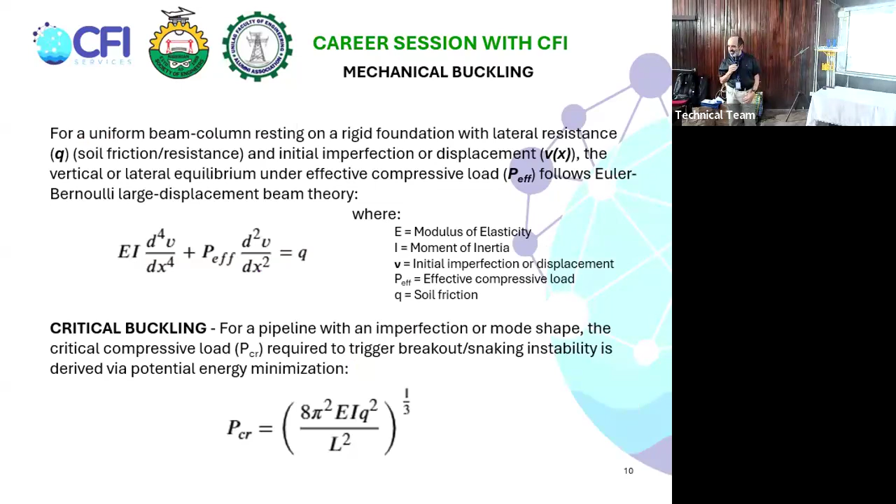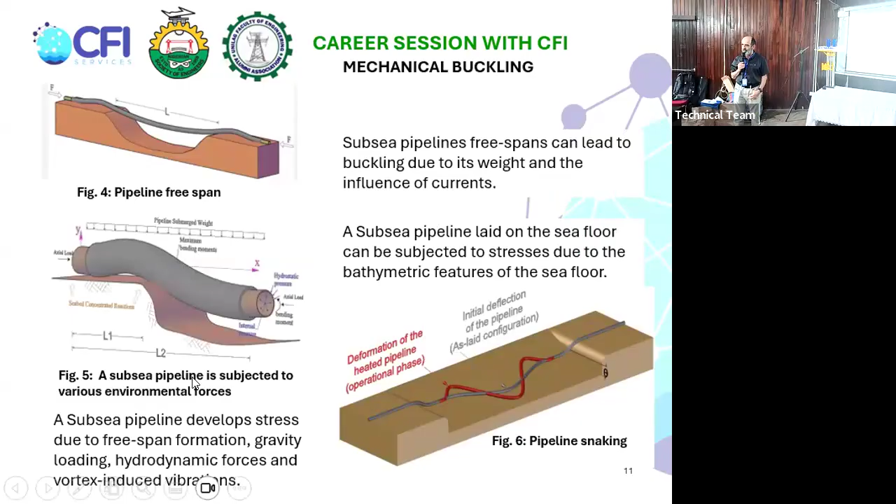Here are some examples of potential for buckling. The top one on the left, as I mentioned, is when the sea currents move away the soil that was supporting the pipeline. So the pipeline is now in the air with a tunnel underneath that could be wide enough to make the pipeline unstable and make it want to fall into that hole because of the weight, and then it can buckle. That's called a free span pipe. It has no support, like a bridge with no support in the middle. So they can lead to buckling due to the weight of the pipe and the influence of currents.

Then you have the other one here. If the pipe comes down a difference in height, also on that curve, it can buckle. Because another thing that can make pipeline buckle is temperature inside the pipeline. Thermal stress in the pipeline over long distances can make the pipeline shrink or lengthen or expand. And that could be also a reason for buckling.

Another one that you see on the right on figure 6 is the snaking, which could be caused by currents also. If you have a long stretch of pipeline on an area of mud where there is not much friction, the currents might start moving the pipeline around and it forms this S shape. So it's either by fatigue or by the shape of that curvature, it could lead to buckling as well in that case. So you never want to install a pipeline without studying on-bottom stability.

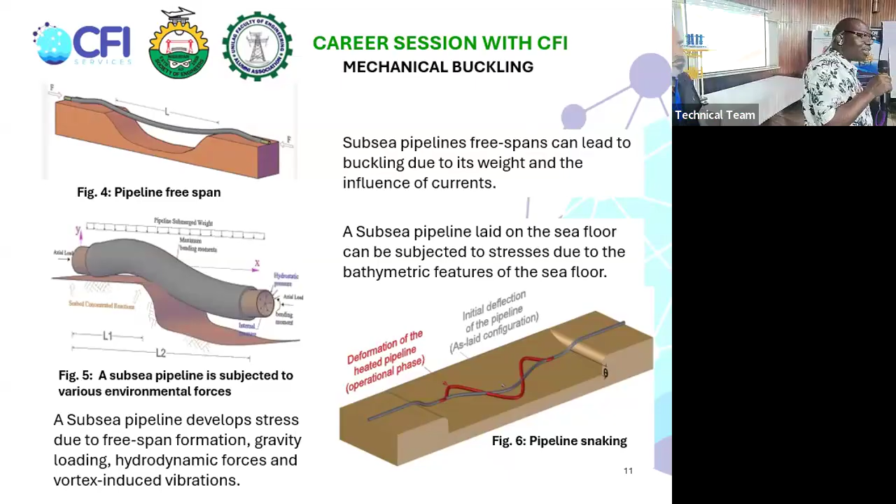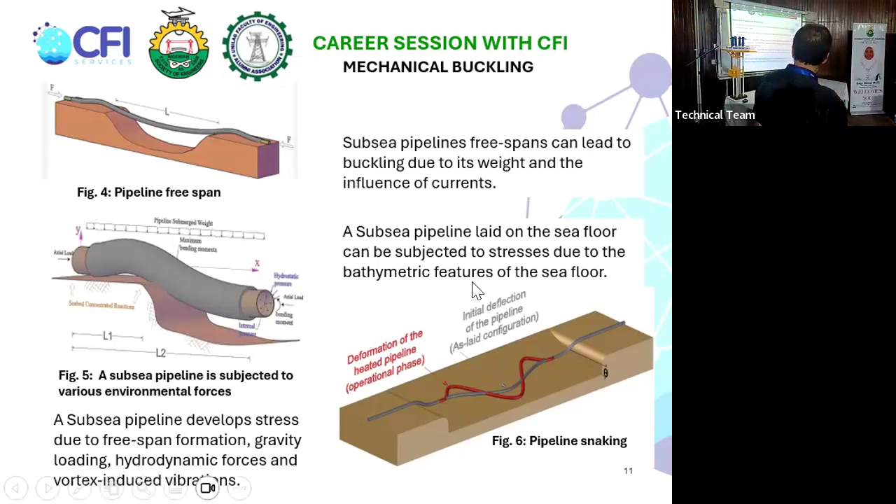So as we were talking already, pipeline stability can be considered based on two parameters: either the maximum content density, so the pipeline is either water filled or filled with the product to add to the weight of the pipe, or you can also consider minimum density, which is when it's totally empty, full of air. That's when it wants to float, to come up to the surface. Both cases are a stability situation.

If, in the first case, the pipeline with the product is too heavy for the soil because it's maybe not wide enough in diameter, it might be a 6-inch pipeline, heavy with the product inside, and the soil is very soft. That's why in our lingo we call it the mud line, because it's all mud, like pudding. If it's too heavy, it will start sinking into the mud. So you don't want it to sink, and you don't want it to float. So you have to consider both situations for stability.

So if none of that is the problem, if the specific weight of the pipe is less than that of the soil, which means the soil is stronger, there's no problem. The pipeline will stay where it's supposed to be.

Otherwise, if the soil is liquefied, the pipeline can sink. Because when you liquefy soil, it's basically mud, it will not have much shear strength or compressive strength. So both pipelines should be checked for possible sinking or floating, as I explained.

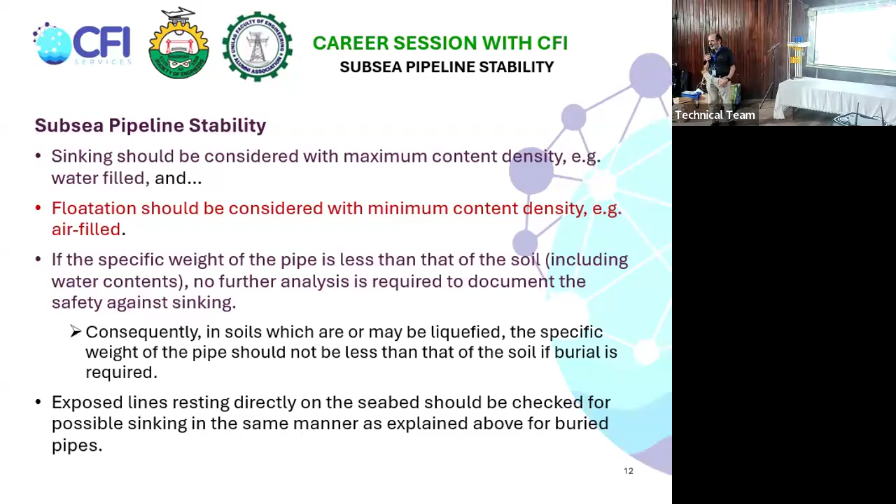So here is an illustration of the forces that the pipeline on the seafloor is experiencing. It's experiencing its own weight going down. If the soil is strong enough, it exerts a force upward so the pipeline stays on the surface. There's also a lift force if the pipeline is not heavy enough, lifting it up.

And then you have waves and current forces, especially in shallow water. The currents at the surface reflect all the way down to the seafloor in shallow waters. So pipelines can be easily moved in shallow waters.

That's why most of the times, as the pipeline approaches the beach, if it's coming ashore, you don't want the pipeline to be on top of the soil going through the breaking wave zone, because it will be moving around a lot due to currents. They want to drill and put it under the beach to cross the breaking wave zone for the safety and stability of the pipeline.

And then you have some horizontal drag force, caused by the waves and currents trying to move the pipeline around. And again, you see the mud line there.

For all of this, when working in this industry, we have two reports: the Met-Ocean report and the geotechnical report. One indicates the currents, speeds, wind force, and wave sizes for many different return periods, like 5 years, 10 years, 100 years, or 500 years of wave data and currents. The other is the geotechnical report, the soil data indicating what kind of soils you have below. That's always very important for the design of the platforms.

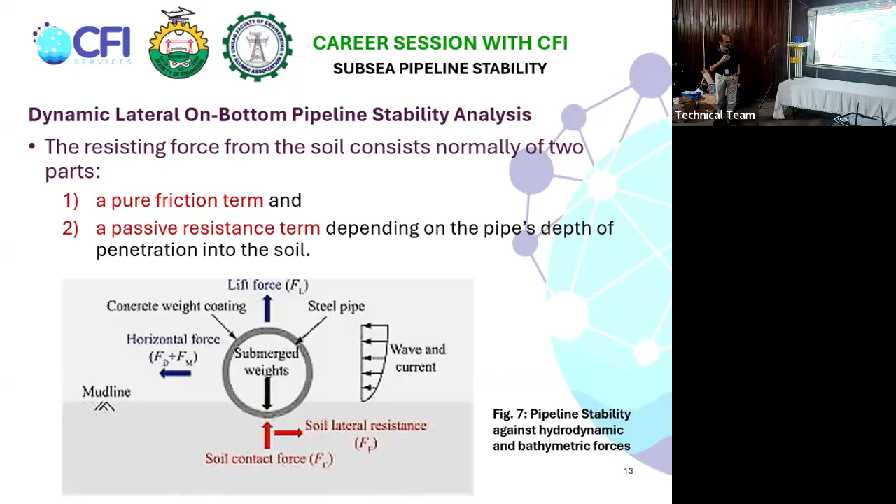Now, if you use SACS, the main software for design, you want to specify the wave theory. This is from API RP2A, the American Petroleum Institute recommended practice, showing the applicability of the different wave theories.

You have the linear or Airy function, normally applicable for intermediate, deep, or very deep waters, not shallow water. Then you have the Stokes or stream function, which is applicable more towards shallow water, but it also depends on the ratio of wave height over the apparent period of the wave times gravity.

So you have to resolve that equation to decide where your point falls on this graph and decide which theory you should use in SACS when you input wave heights and periods to calculate the most important forces on the structures. On platforms, for example, these are generated by waves and currents that create big overturning moments, which have to be resisted by whatever is securing the structure on the seafloor. So that's what you need to look at.

Generally, the stream theory, the stream function with different orders like O11 and so on, is the one used almost everywhere because it's good for anything except fatigue. For fatigue, we use the Airy theory because it's the simplest to work with, more linearized than the others. But this is how wave theory applicability works in offshore design.

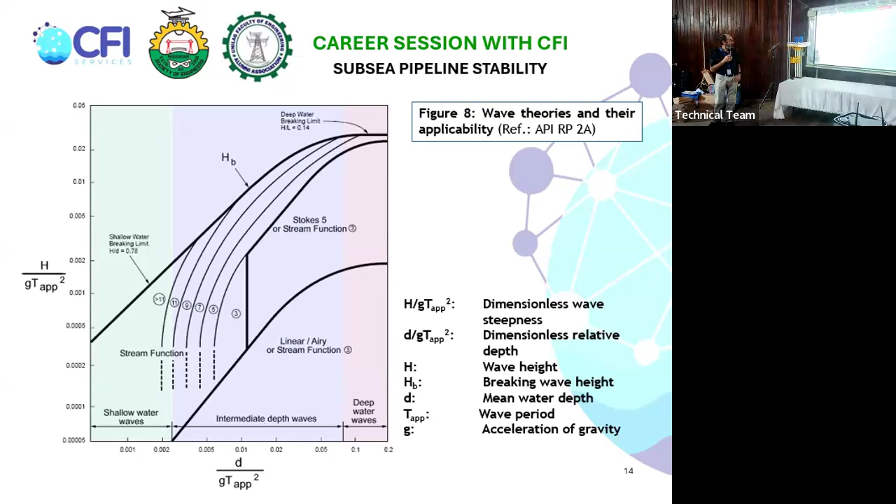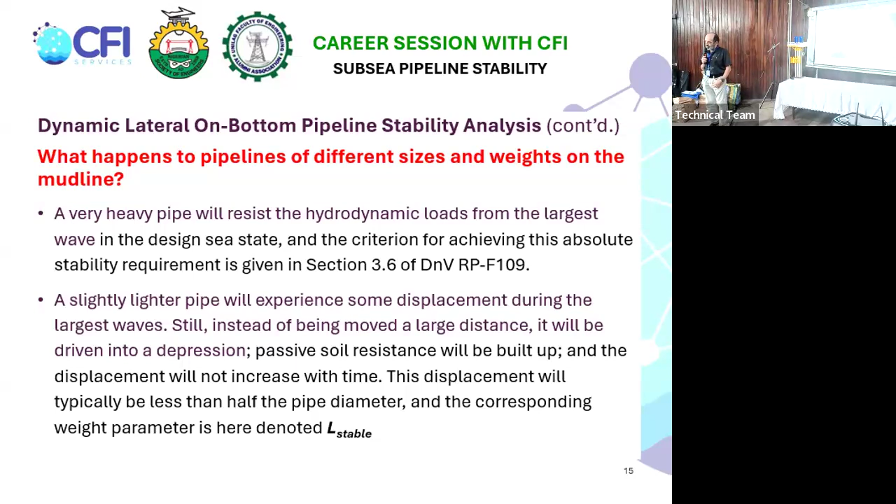Next one. That's the end of it. No, that's how friendly we are. Thank you very much. If you have any questions, go ahead. So you talked about the mud line versus the seafloor.

Is it only silty, or is it just about when we encounter rocky layers? It's not every layer of sand that is silty. So what about when we encounter a rocky layer? How can we base our pipeline across that layer?

If it offers more resistance against sinking, for example, generally it's mud for about 8 meters or so. Below the seafloor is just pure clay, mud. Below that is a mixture of mud and sand, starting to mix with sand. Then it can have clay, then sand, and so forth, all the way as you go deeper. Eventually it turns into mostly clay or hard rock.

So is it a rare case that we see a rock layer at our mud line? Normally, it's not rock at the mud line, that's not typical, unless you're doing a pipeline over a coral or shallow water coral reef. Otherwise, it will mostly be muddy, clayey mud, which actually makes your piles need to go deeper, because if it were rock, the pile would have good support right at the mud line.

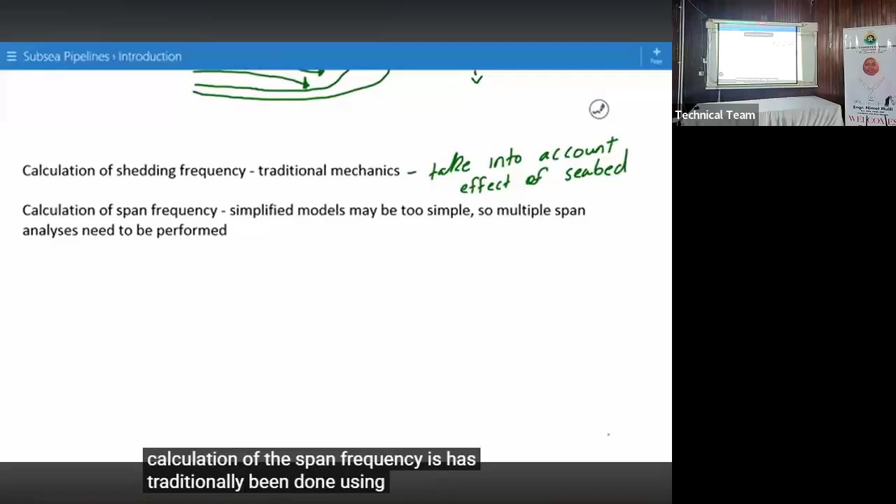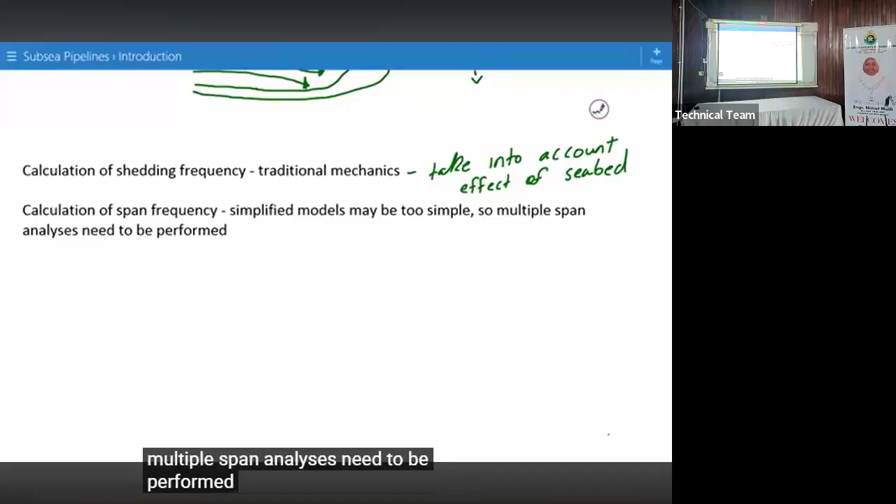The calculation of the span frequency has traditionally been done using simplified models, but recent theories have suggested that these simplified models may be too simple, so for that reason multiple span analyses need to be performed. This is the end of lecture 4 on span analysis. Thanks.

One major difference between being in the estuary of a river or being away from a river in the ocean.

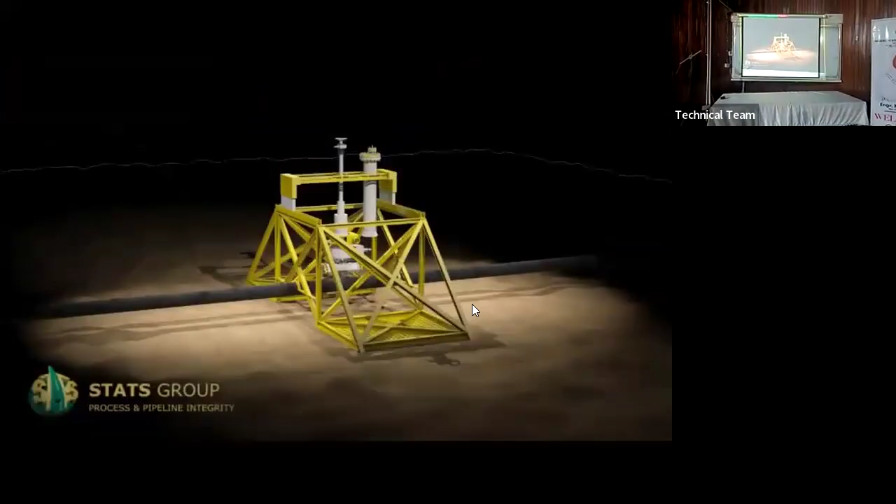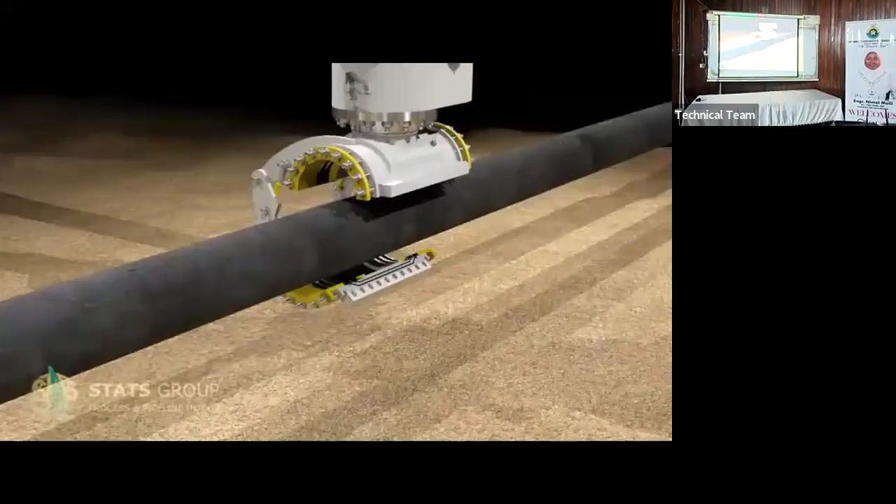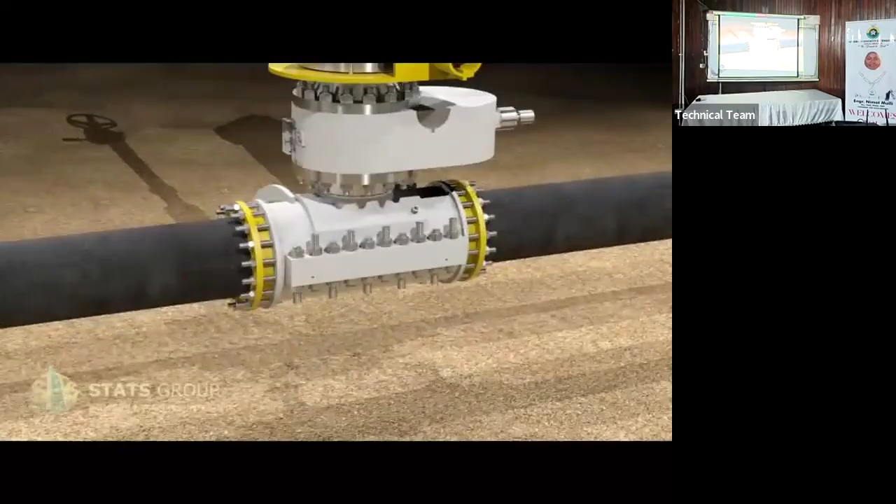This one is repairing a pipeline in situ. You can see videos where they have a lot of automation to repair pipelines on the seafloor. Somewhere you can go where they put a big chamber around the pipeline, exhaust all the water, and the guy is welding in an atmosphere inside, with the pipeline entering one end of that enclosure and leaving the other end, performing the work in the middle, in the sea, under the water at some depth.

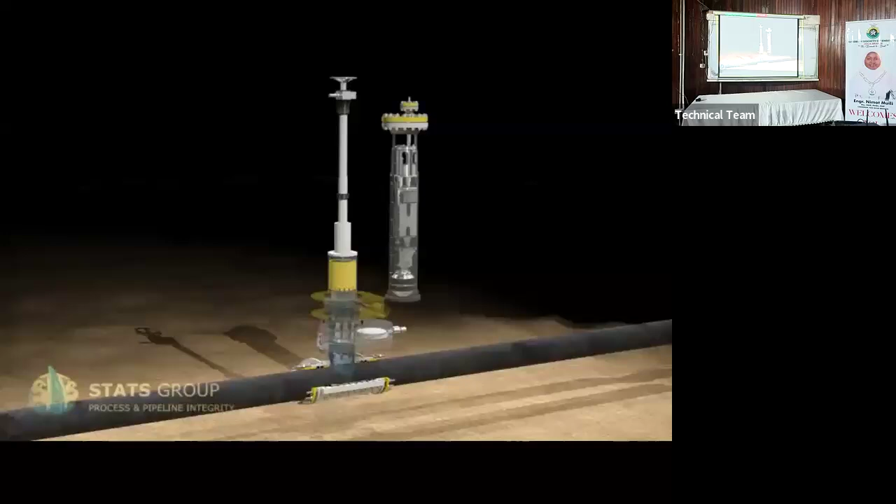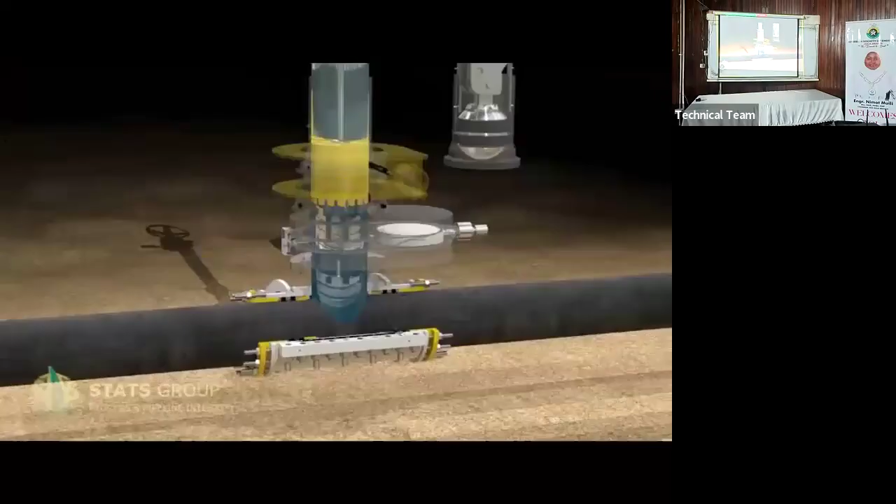It looks like what they're going to do on this one is a hot tap. They're going to perforate and attach a T with the pipeline in function, not stopping the pipeline flow inside the pipeline. So now they have a T branch right there. Hot tap.

They're putting a plug inside the pipeline to isolate some part of the pipeline by stopping the flow.

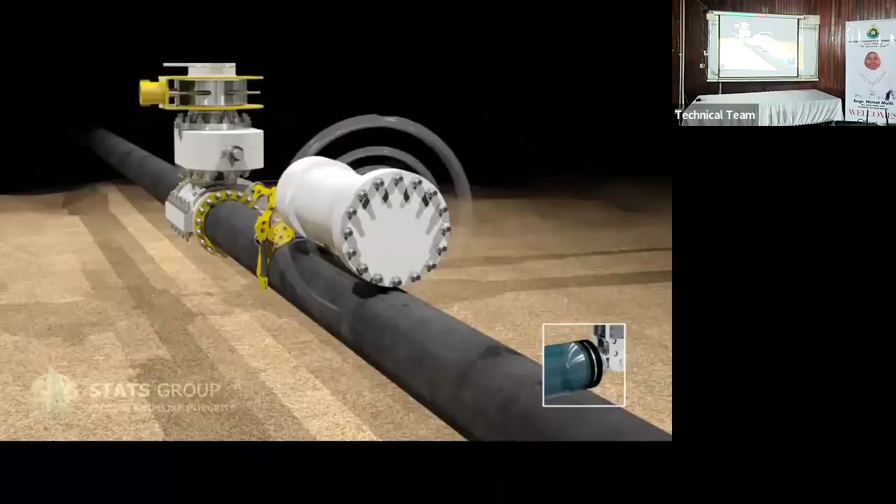As you can see, they're going to remove that buckled area.

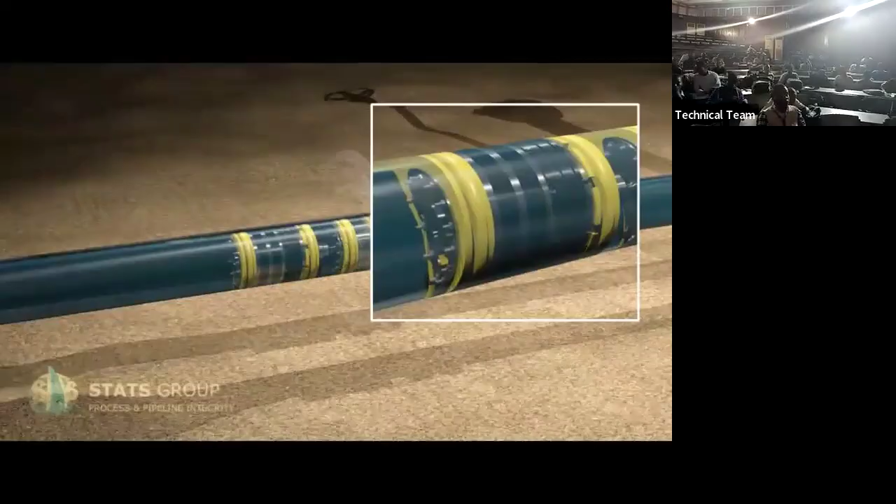If the machine has any electronics, then they call it an intelligent vehicle.

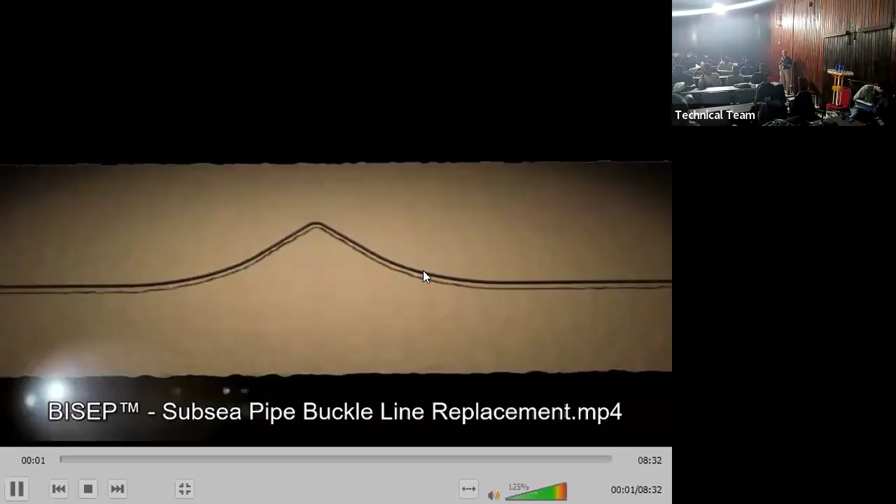The buckle, the misalignment, has been replaced straight. And I believe this is it from our side.